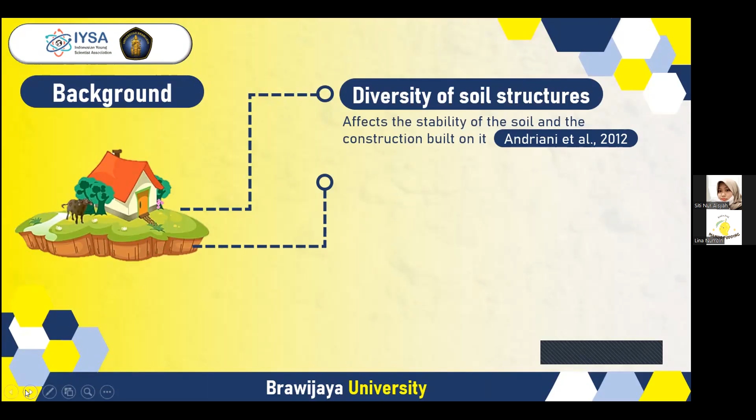The diversity of soil structure conditions makes each type of soil have different properties, so it will affect the stability of soil and building construction. Generally, the territory of Indonesia is covered by soil with high plasticity properties. The nature of plasticity is the cause of damage to building construction, especially the foundation part, which is the basic construction that connects the building to the ground.

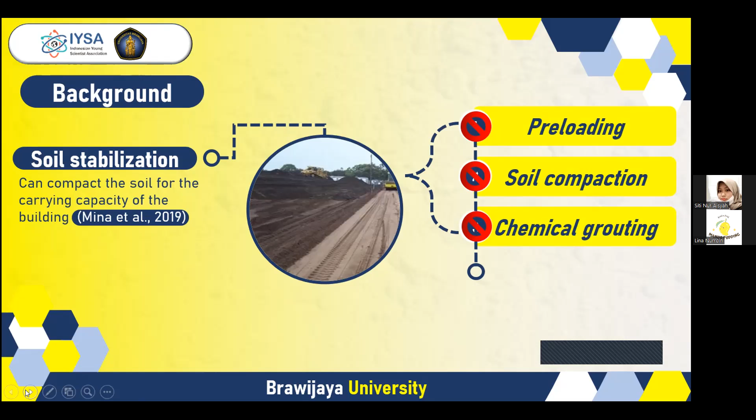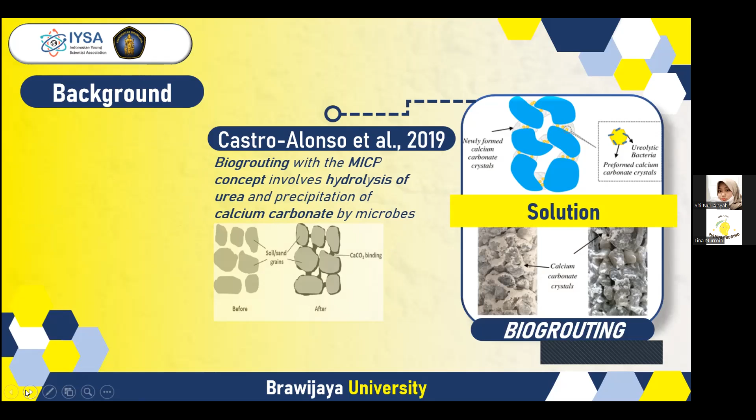Soil stabilization is needed to help improve soil properties, which can be done by preloading, soil compaction, and chemical grouting. However, these methods are quite expensive and not environmentally friendly. Regarding the problem, grouting can be done in another way, namely biogrouting. The concept of biogrouting is carried out to help increase efficiency and reduce the impact on the environment by utilizing bacteria as a grouting material. This research is expected to help develop sustainable and environmentally friendly soil stabilization technology.

This research was conducted first by a study to construct the research design, followed by survey and preparation of tools and material, and then preparing the aerobic bacteria culture and subculture. Then the culture is substituted with calcium acetate, and the sand and soil samples are prepared by cutting and sifting. The mixture of bacteria and media is then mixed into the sand and soil samples with different bacterial densities, which are 10 to the power 5, 10 to the power 6, and 10 to the power 7. Then they undergo an incubation of 40 days.

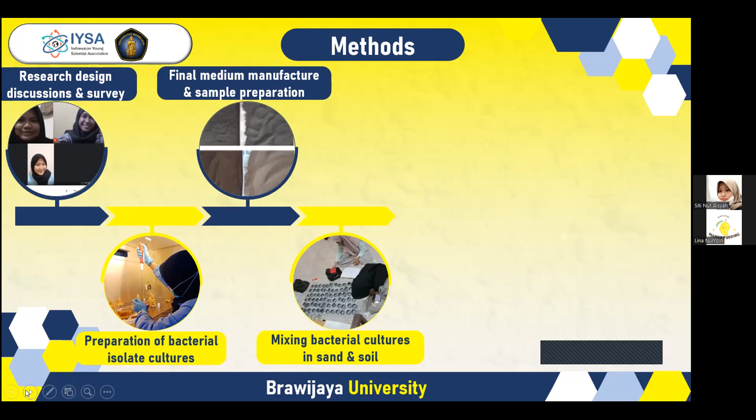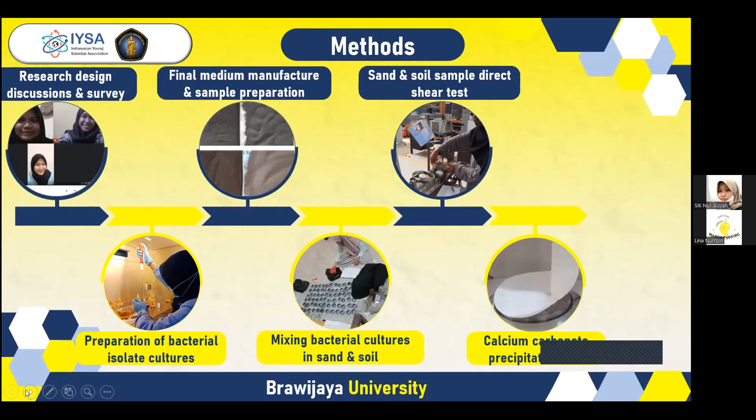After 40 days, a direct shear test, a calcium carbonate precipitation test, and a moisture content test were performed on the sample. The calcium carbonate precipitation test resulted in proof of the calcium carbonate precipitation ability of the bacteria after 24 hours of incubation. The R20 isolate was able to produce calcium carbonate precipitates with an average of 0.10742 gram per 50 milliliters for 3 replications. Based on the test conducted by Caparo Acuna and team in 2018, calcium acetate is the best source of calcium in the induction of calcium carbonate precipitation.

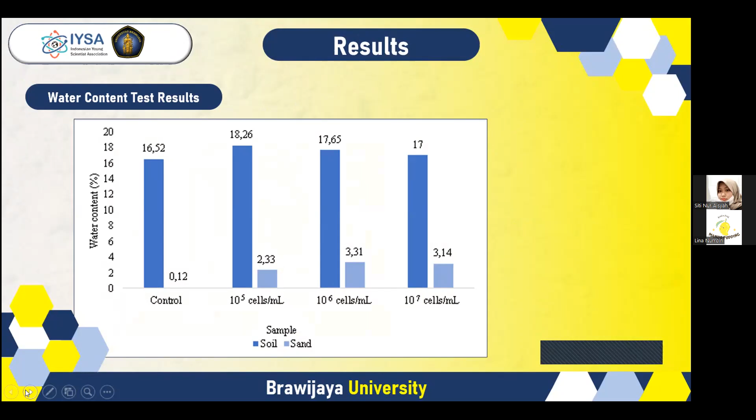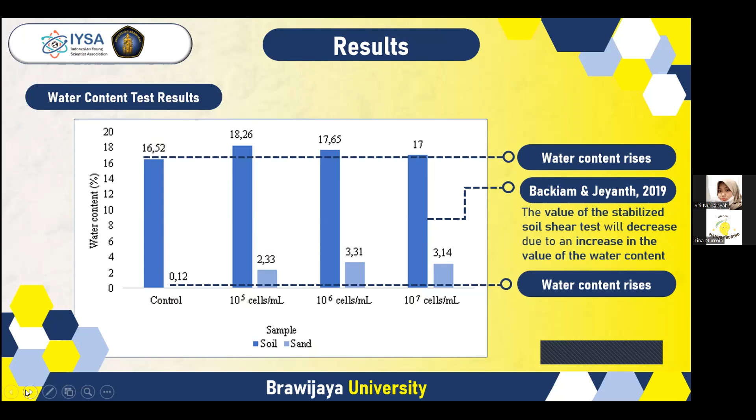Here, the following table is a data representation from the result of the sample moisture content test. The addition of bacteria to soil and sand samples generally causes an increase in water content for all bacteria densities of 10 to the power 5, 10 to the power 6, and 10 to the power 7 cells per milliliter. According to Backiam and Jeyanth in their publication in 2019, an increase of water content in stabilized soil is considered to be able to reduce the value of the shear test. However, several shear test values and the calculation of cohesion values carried out in this study show the opposite result, indicating an increase in cohesion between soil and sand particles.

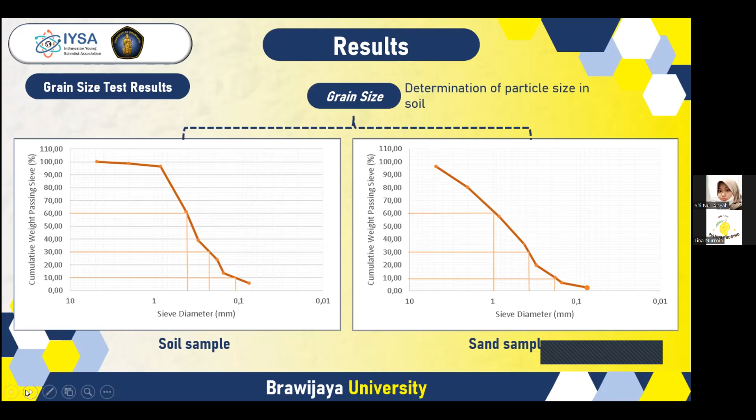Here, the grain size test indicates that the sand and soil used was silt and fine sand based on the variation in particle size using the AASHTO classification system. The last one is the direct shear test, which is a test to determine the parameter of the soil shear strength, the value of cohesion.

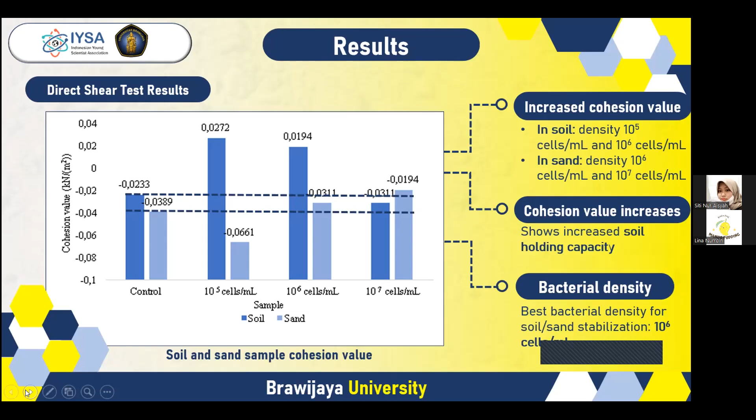Alright, that was everything for our presentation. Winston Churchill once said, "What you know is not important. What you do with what you know is much more important."